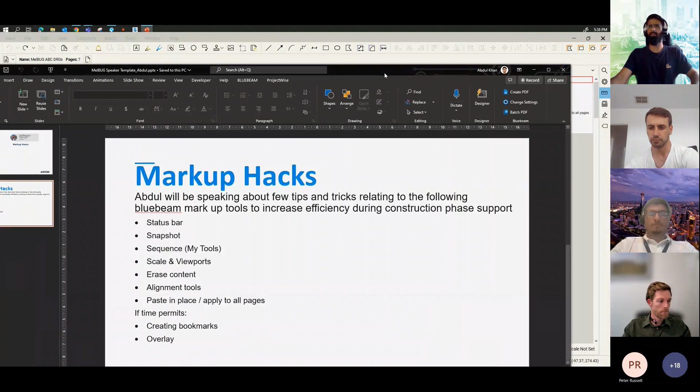Just a quick one - I'll be talking a little bit about status bar, snapshots, that's the agenda for my time. Not sure how much time I'll be getting, but I'm expecting anywhere between 15-20 minutes max per presentation. So snapshot, then sequencing, a little bit about scales and viewports, and then how to erase content from the PDF, along with a few alignment tools, paste in place, apply to all pages. And if time permits, I'd go into creating bookmarks and finally overlay.

Does that timeline sound good, Ben? 15-20 minutes? Yeah, that's perfect. Yep, awesome, sounds good. So I've just created one of the PDFs on drawings.

So this is just for information only, disclaimer, not to be used for construction. I've got a few bridge and building drawings - bridge I've got from my side, Shannock provided a few building drawings from Bluebeam, standard ones. Hopefully you recognize a few.

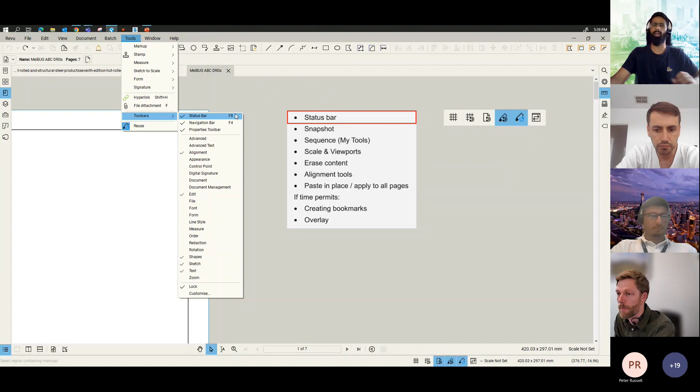So just talking first about the status bar - you'll find it under tools. If you go to toolbar, you need to activate that from here, tick box status bar at the bottom, or you can use F8 as well. So here you've got 4 or 5 options. First thing is show the grid.

So you can turn on, turn off the grid. Second one, snap to grid - so when you have the grid on and you want to start a line or any of the tools, it just snaps to the grid. I normally have the last 3 options open all the time when I'm doing my markups.

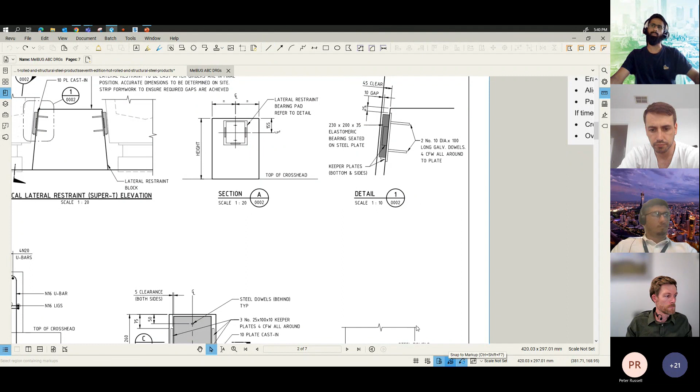So the next one is snap to content - say, for example, I've got a few drawings, so if I'm starting a line or any other tool, it will just snap to the content straight on. And the fourth one is snap to markup - if I've got red line markups or any other markups, I can even snap to those.

This one's a favorite. Sometimes you can repeat things when you're drawing reinforcement, rebars, and things like that - even the sequence, the reuse bar helps. And then I'll be talking about my tools as well, so yeah, I can show you what it does.

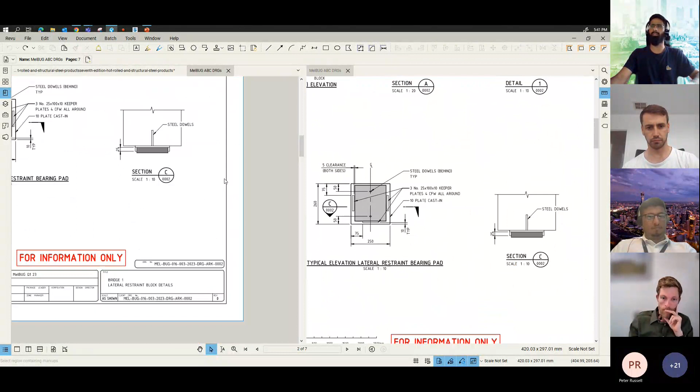And then finally, this is synchronized view - so when you're looking at 2 drawings at the same time, maybe 2 different revisions, you want to see a split view. Say for example, I would just split this, and then as I synchronize, you've got 2 different revisions working at the same time. That's really helpful - if you have any changes at a different location in the drawing, you can just zoom in, check through, and markup.

Yeah, so that's a quick one. Moving on to the second bit, that's the snapshot. So working on CPS, I realized a lot of the times you already have the design drawings ready to use.

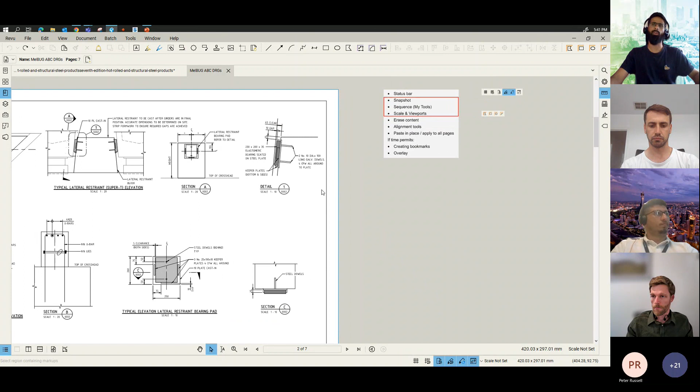Most of the packages are already complete, IFC'd. And then from the standard packages, if you want to do an RFI response or update a checkprint drawing, you can just use existing markups or existing IFC drawings and then modify them. Best way of using it is snapshot. On the project I was working on previously, and even now, is redline markup. So we normally do things on redline.

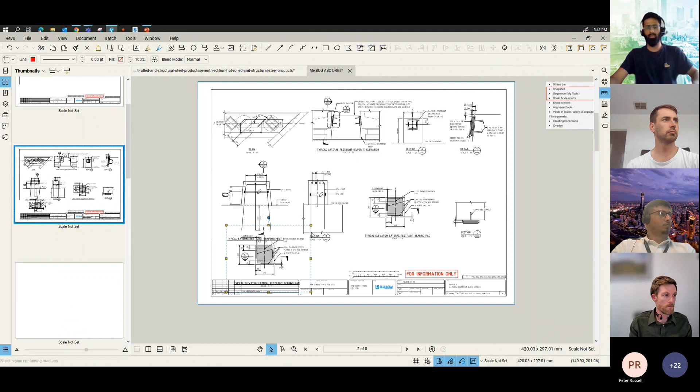So say, for example, I'm putting an example of lateral restraint block. Can just snip it, takes a snapshot, and say I want to use it and paste it, Control V. So because the project requires redline markup, say if I'm using a new page, just to demonstrate. Instead of a blank page, yeah, go. Let's move it up. Oops. Yeah. Control X. Coming through. Oops. Paste. All right. So you've got your snapshot.

Couple of options with the snapshot itself. Under properties, you've got change color. That's really handy, which I learned at the start of my CPS. So you can colorize, you can literally add any color you want. Use the existing CAD drawing, say there you go, and then add updates relevant to any of your new updates, new checkprints.

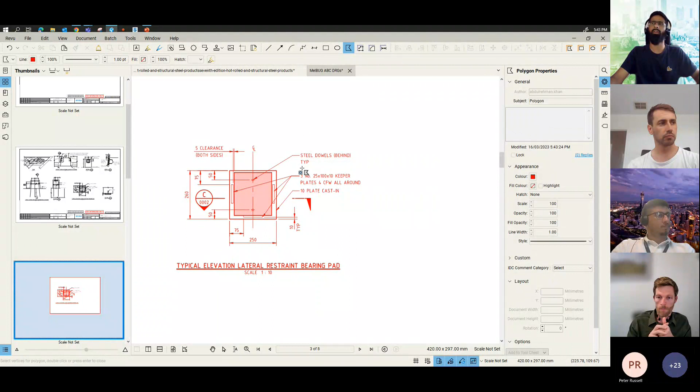The other good thing with the snapshot is, yes, you can add extra boxes or rectangles. I normally use polygon if things don't work. So just put up a polygon and then fill it in with something like white, normally to hide things, and then make it transparent. Just, yeah, there you go. So those previous markups are gone. And you can do the same thing even if it's internal minor details where you want to use a polygon or rectangle or different object to hide things or mask up. That's a snapshot. Let me know if I'm going too fast or too slow.

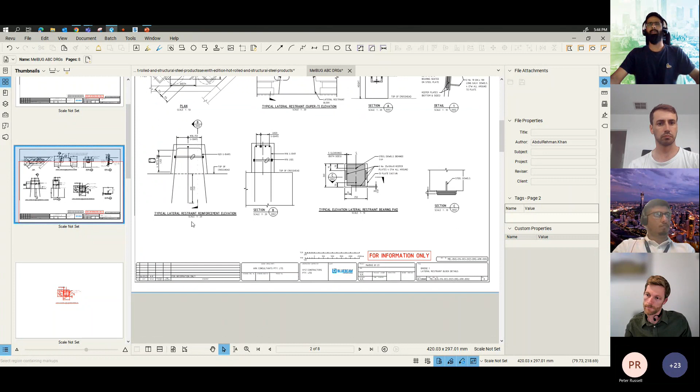Second thing is sequencing using My Tools. This is one of the hacks I think Shannon taught me how to use. One of our engineers wanted to work out a count, and they wanted to see how the sequencing would work. So, for example, I've got number 1 in the series, and I've just saved it there. What the sequence does is, say I've got it here, for example. Normally, you need to save it in your My Tools chest, and then, what's that? Add to tool chest, My Tools. There you go. But if I'm trying to reuse it, it's just copying over. So you just get the same number series.

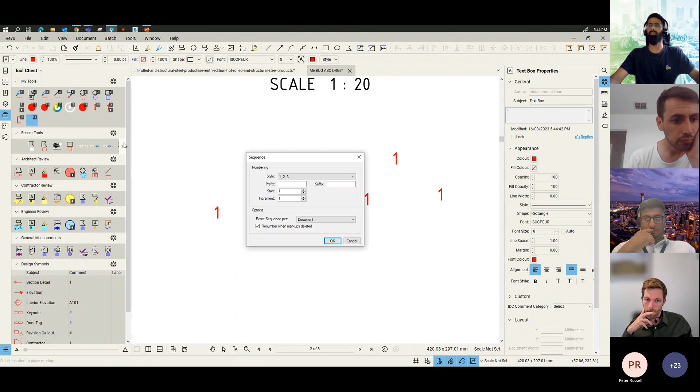However, if I go there and then change the sequence, so define a sequence there, starting prefix 1, increment 1, you can have multiples of 2 or 3, up to you. Then it increases 1 by 1. So for example, now I'm using the same thing with the reuse markup tool. Say 1, 2, 3. There you go. So that's an easy way of adding a sequence, counting things. I know you can do the count measure, but if you have a number in front of you, that would be easier to count things. That's a sequence, and probably I'll just leave them there.

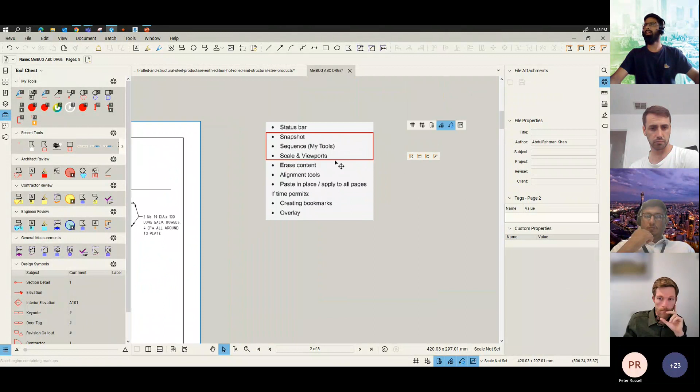Scale and viewport. And if you have any questions, maybe you can ask on the go as well. So scale and viewports, I think my estimator friends or even architects would love the scale and viewport side of things. Normally, when you're using scale, you've got scale up there. I've just changed the side bar, so I've got my search and then the other bar there to use thumbnails. It's easy to navigate and also gives an Adobe view, I guess.

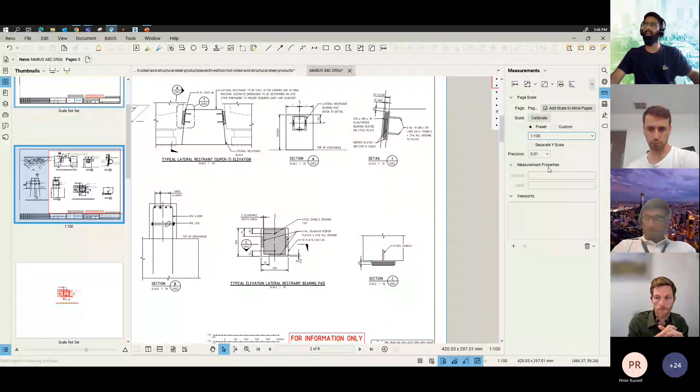Coming on to scale, you can calibrate if you don't have any scale there, or I normally prefer to use preset, say 1 in 100, and then precision 1. There's a good option: you can apply this to all other pages. So literally the whole set in one go. So say add scale to more pages. So I can apply that to all of the pages. So my scale stays 1 in 100 on every other page in this drawing set.

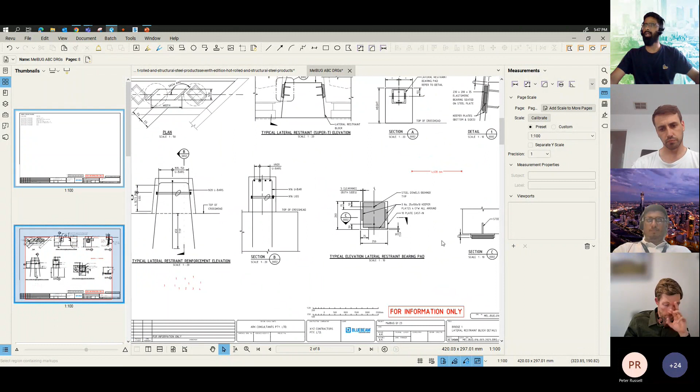Moving on to viewports. Scale, now you know that you can use that for measurement, say 1 in 100. I've got precision, so that's 4 meters there. Just an example of using 1 in 100. But now, say in this case, I've got 1 in 10 and 1 in 20 as well. So they're different scales. Here's where the viewport would come in handy. What it does is basically add custom scales in the same whole drawing based on the region.

Say, for example, I'm defining this region there. That's 1 in 100, change to 1 in 10. So there you go. Apply. And it's created 1 in 10. Now, if I move the same measurement, which I was using for 1 in 100, there you go.

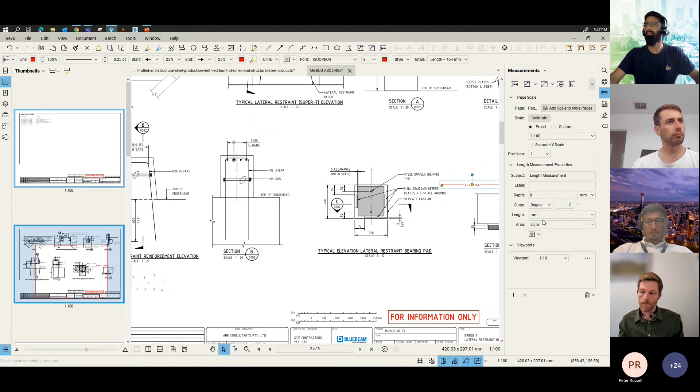It changes, updates. Oh, yeah, 1 in 10, 464. So basically, what I'm trying to do here is create viewports separately. And as an estimator, you take out the quantities. You can easily do quantity takeoffs using 1 in 20, 1 in 10. So if I'm adding another viewport, say for 1 in 20, without any dimensions, you can measure the dimensions as an engineer to double check the drafting I've done.

In this case, I'm using 1 in 20, so the height of my lateral restraint block is 650 mil, and you can add precision if you want. But if I move the same dimension into another viewport, it actually updates itself. So 350, and there you go.

That's how I use viewports, and you can have multiple viewports in the same drawing set, and for the rest of the area, because you've got 1 in 100, it still works as 1 in 100 outside the viewports. That was it for the viewports.

Okay, this is another one which I recently found: sketch to scale. Normally, we are using polygons, rectangles, shapes. However, there's also an option to use rectangle sketch to scale or polygon sketch to scale. What does that do? You can define literally the width and also the height.

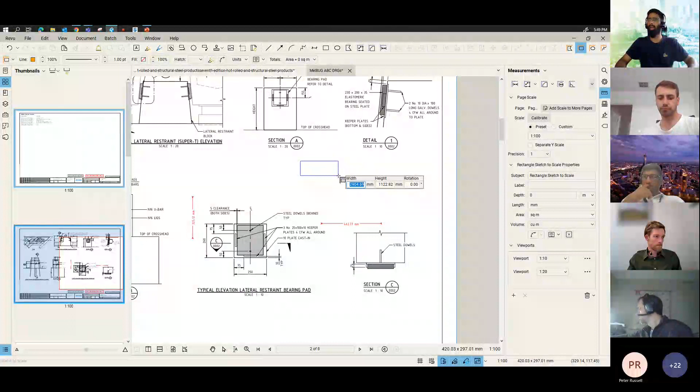Say, for example, I want 400, then tab. You press tab, you go to height. Sorry. 400 tab, say 600 high. So there you go. That's to scale, 1 in 100, depending on which location it is. Yeah, so this is 1 in 100 with the dimension.

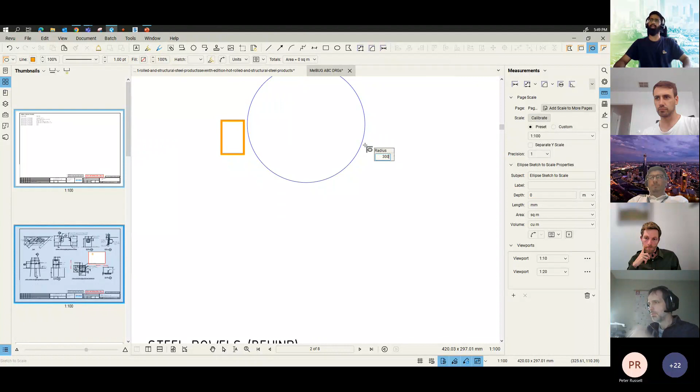Same way, you can create other objects as well. Say, for example, a circle. I've got a 300 radius circle. Same, you can do it with the polygon and polyline as well. Say, for example, I'm doing a crank bar, 1 in 100 scale, say 300 tab. Sorry.

You can use shift for angles, so if you're going horizontal, vertical, and also 45 degrees, holding shift helps. 300, enter, and then I go 45, shift, up, enter, then again 300, double enter. So there you go, that's a crank bar. And that's still to scale, depending on the dimensions you've given. So that's to scale.

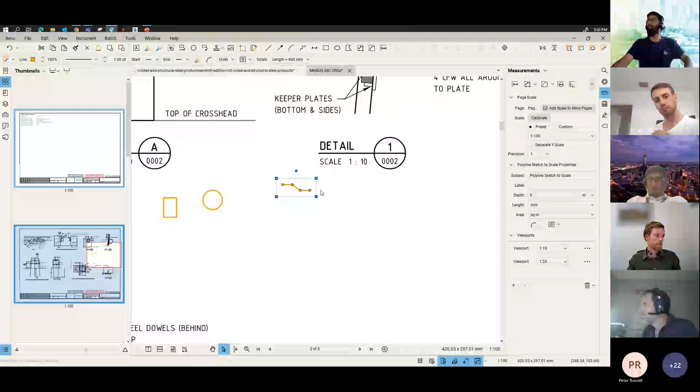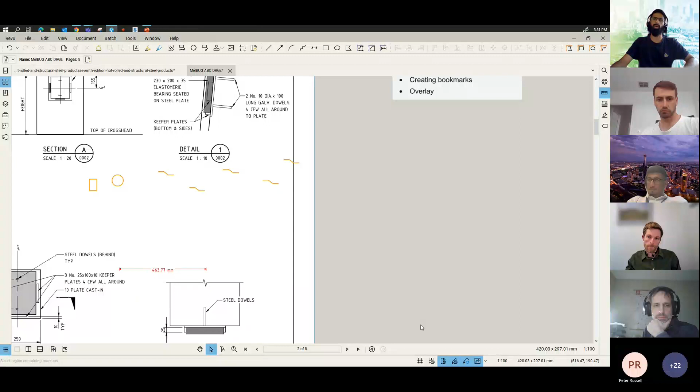Right, so I'll jump into alignment tools because we've already had a few things created here, and then I'll come back to the erase content. Say, for example, I'll use the same crank bars, just copying over a few times. So this is what I was talking about, use of grid and reusing markup tools. If you have it saved under your Tool Chest, you can create it multiple times by just having that option open.

This is my alignment tool. Of course, I've again had those on using the toolbar. So under alignment, there you go. That's where you can find alignment tools. Using that, you can distribute horizontally. What it does is it takes the extreme ends, the front one and the rear one, and then just distributes the objects evenly, same way vertically, and then you can align them all in one place.

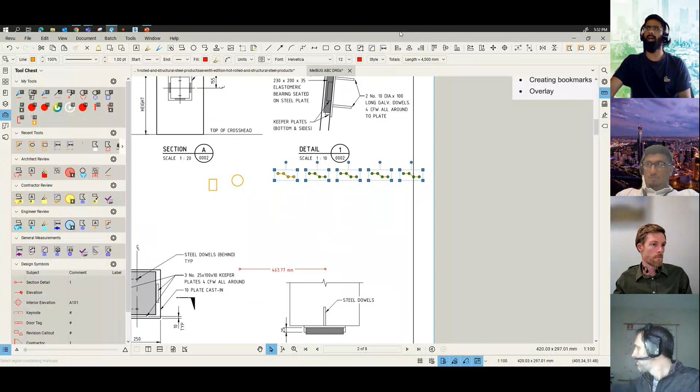So yeah, the distribution. The same way Word works, the alignment things work the same. You can also flip things. Really handy when it comes to flipping orientation of sections, different views. So you can use flip. This one always brings things to the center of your page. So if I click that, it goes all the way to the center of the page.

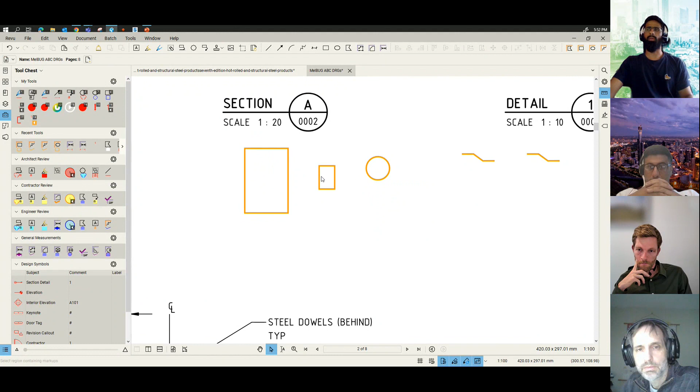The other one I was trying to do was use of this scaled version of my box. Control C, Control V. Say, for example, I've changed the orientation. These are two different size boxes. However, say for a square section, I want them to align, have the same width or same height. So now I'm checking the align height options. How they work is whichever object you select first will be your reference.

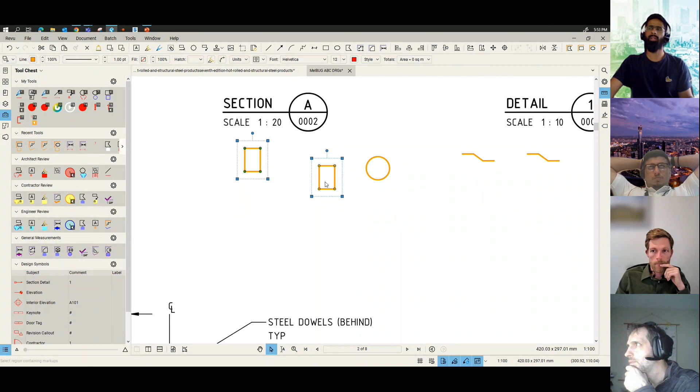So for example, I'm going left to right. That means this is going to be selected first. Based on this reference, align height and align width would work. I'm trying to make this rectangle the same as that in terms of width. Okay, so it's the other way around. But anyway, whichever one you select first will be your reference. Now I'm trying the height. There you go. That's really handy when you're trying to bring different shapes that are already created into scale.

That's alignment tools. How much time have I got? Probably. Lucky or Ben? Yeah, another sort of 7 minutes. Okay. I still have enough time. Okay, good.

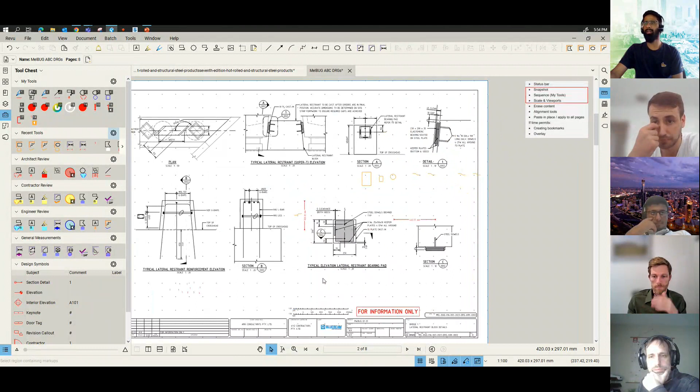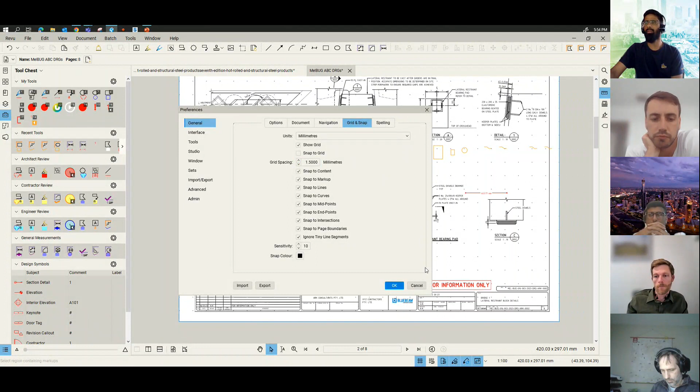So normally the best way of doing the reinforcement and tool spacing is using the grid. Coming back to the grid, you can customize it. If you go under Revu, you've got Preferences, and there you've got grid snap. Initially I've defined my global scale, say 1:100. So I can define units, millimeter, and then set the scale based on 1:100. In this case, it would be 150 mil spacing for the reinforcement: 150 divided by 100 is 1.5 mil. And that basically is 150 spaced.

You've already had one of the shapes created. I've got a filled circle there, and then I can just snap to the grid. What is that doing? Okay, maybe I'm too far. Okay, there you go. So that's 1:100. I think that's too small. Maybe I can change the scale, make it 1:50 maybe.

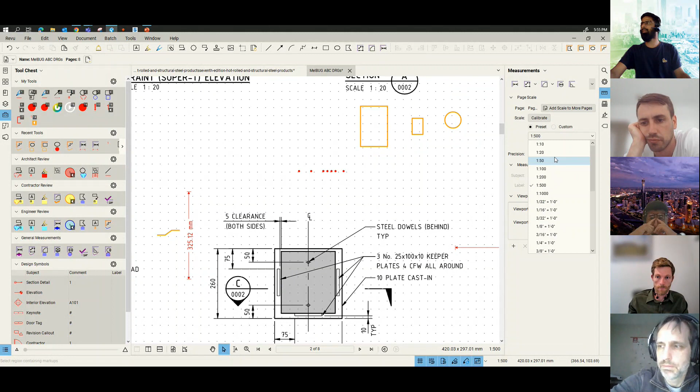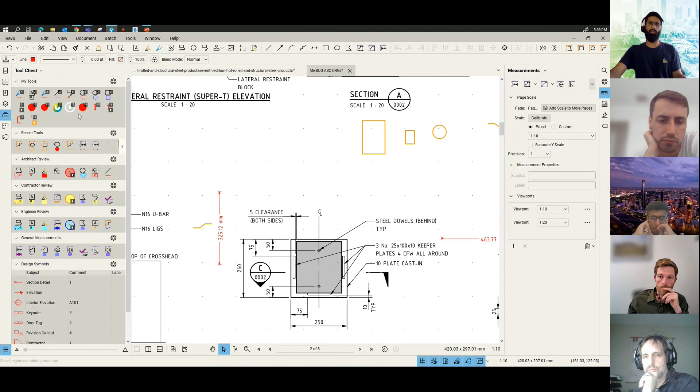Say apply tool scales. Select all. Or maybe make it even smaller, just say 1:10. There you go. And then apply to all pages. Oops, that's preferences, sorry. Scales updated. 15 mil, roughly, grid updates. So now if I'm snapping to grid, there you go. That's all spaced 150.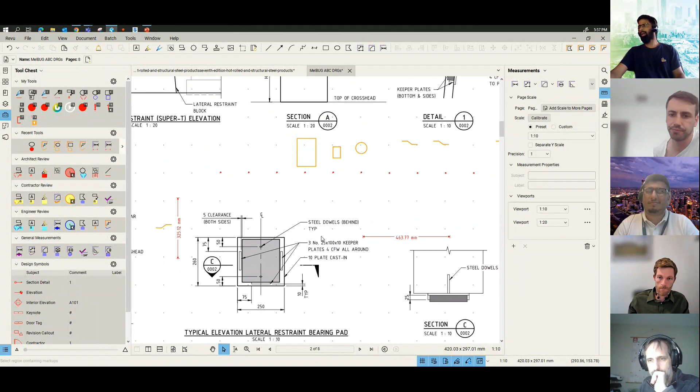You can move them around and group them. Say for example you've got a bigger wall, a retaining wall, a larger longitudinal wall. So you group them, copy the group, and then snap to grid. It's too small anyway. Yeah, that's one of the ways of using snap to grid. And I think that's what I had for those alignment tools.

All right, coming to the erase content. This is really handy when you're trying to erase things within the existing drawing and want to have it neat and clean, without using the polygon option, which I showed previously. For example, say this is a section view of a pile. Clean around, use the existing drawing and just add a few extra markups. Handy tip: never use this erase content option on an existing drawing set. Always have a new file for that. I'll give you the reason why.

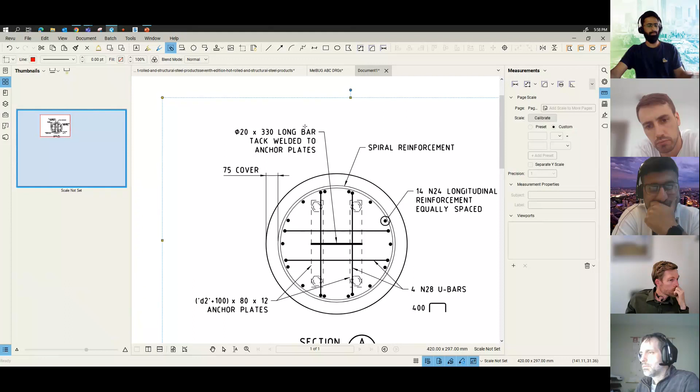Whenever you use the erase content tool, it actually flattens the whole drawing set, and it won't allow you to unflatten back. So it's permanent markups. Anything you already have as a markup stays there; you can't change it. So the best way is to take a snapshot, bring it into a completely new drawing, and then if you want to erase content, even if you have wordings, you still can. So you say erase content, flatten that, and then start erasing the content.

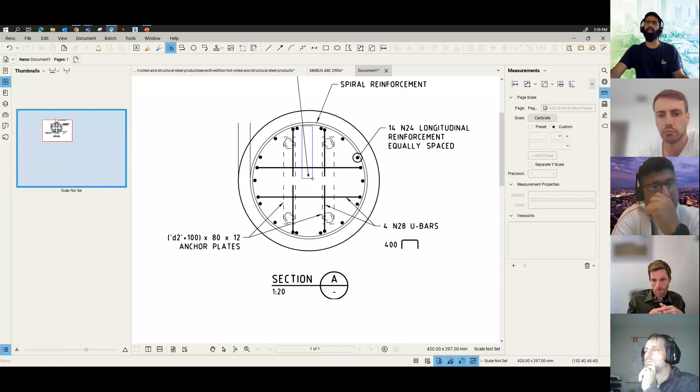Say I'm going to get rid of this cover. Why is that doing that? Oh, snapping. Sorry. There you go. And you can get rid of any of the wordings you had in a drawing. You can even have clean finishes, like getting rid of this rod, or the arrows if you're going to that detail, but I'll leave that to you to decide. I really like to clean up things when I'm issuing or using one of the existing drawings. So you can get rid of those.

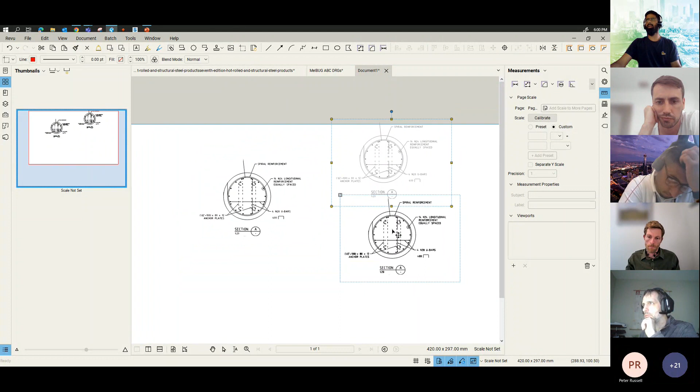Maybe if you want to move the section lower and don't want to show the U bars on the top, just get rid of those U bars, just like that. Make the drawings cleaner. So this is how you can do it. Once you've done this, same old trick: snapshot, copy, and paste, and change color properties if you're using red line markups or other colored markups. So that's the erase content. Right, alignment tools I've completed.

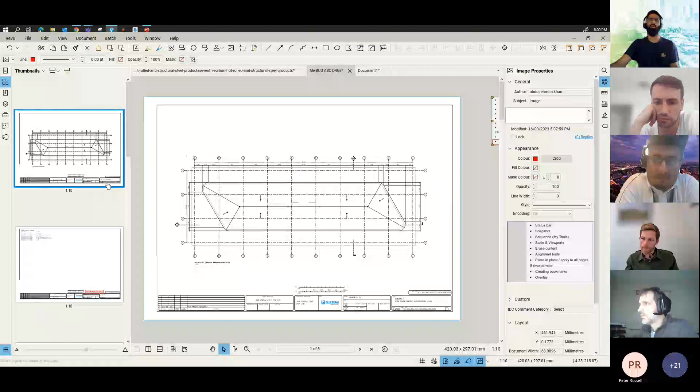Paste in place and apply to all pages. This is really good. Say, for example, you're using two different drawings, and then say you have picked up this markup, just delete one and then show as an example. So I know that every other drawing should have that for information stamp at that location.

So I just copy and then go to the drawing where I've deleted, hit Control-Shift-V. That pastes it in exactly the same location where it was previously. And this also applies to any other markup you have, not only stamps.

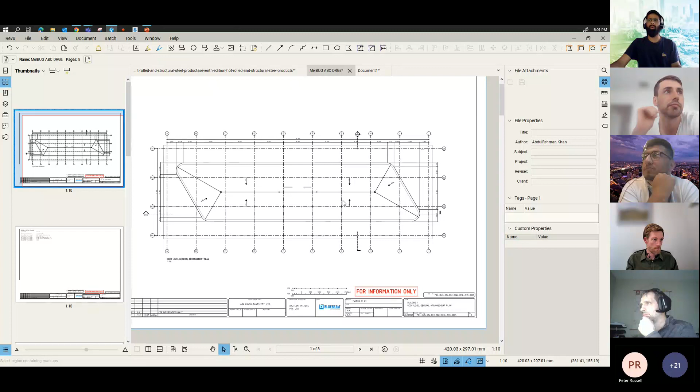So for example, say you've got revisions, updated revisions, and you missed a revision in between for a CPS. Say someone has done XYZ at the same time as you, they have submitted out the check print and you haven't considered that in your drawing. So you can just take their markups, Control-C, and then use the Shift key, Control-Shift-V. It just pastes everything in the same place as the previous drawing without you needing to do anything.

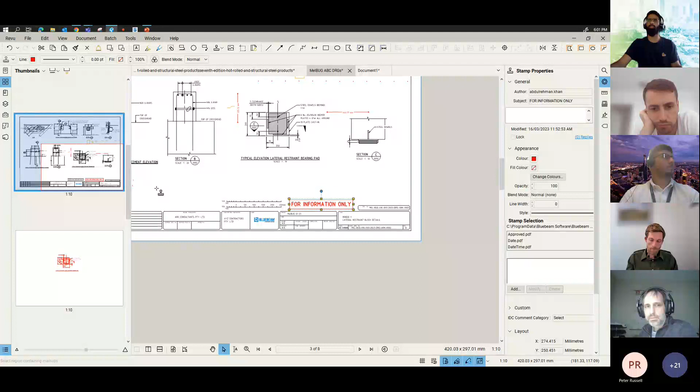Right, so where are we? Apply to all pages. This is really good for these sorts of stamps, when you know the exact location of those stamps, or things like draft. For example, I'll just put up an example draft. Say I'm putting a draft stamp somewhere on the drawing, and I know that location is empty on other drawings as well. So just put it up, paste. Oh, it's just a bit slow. All right, go.

Or it's just for draft, and then no one else can use it for other reasons. You can just rotate, say 45. Rotate. There you go. The other way around. All right, so this is draft, and if you right click, there you can find apply to all pages. It gives you the range. You can apply to all pages, custom range. Yeah, and then hit OK. And it applies to all of those pages.

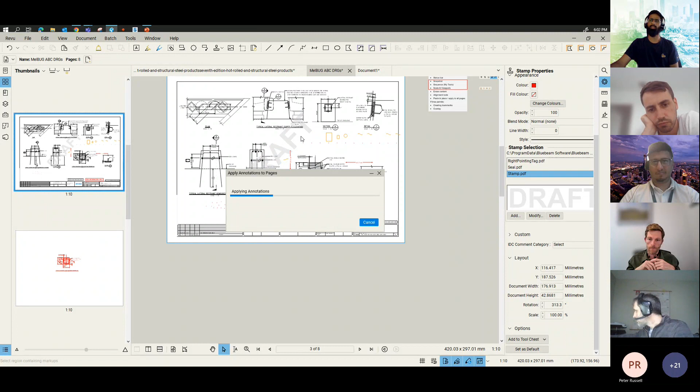It's really good when you're doing mass check prints in one go. So check print stamps, verification stamps. In one go you can have all those once you have completed your checks, of course. And then it applies to all other pages. There you go. Yeah, that's applied to all pages.

So how am I tracking on time? Yeah, you got time for the last one?

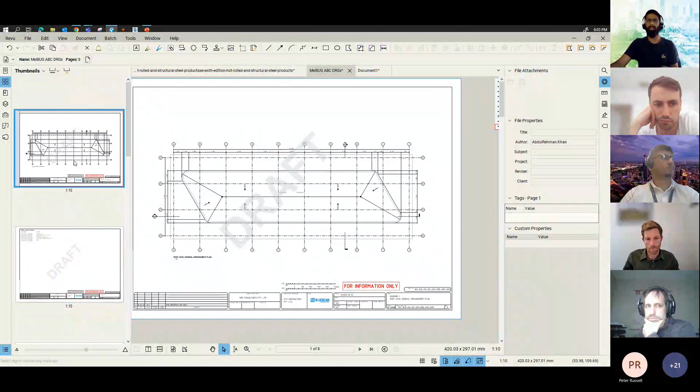Awesome. So this one I'll go overlay. Overlay, I've got 2 drawings. I think I missed. Let's see. A page. Cancel. Just move it down. So I'm kind of comparing these 2 drawings. These were the drawings given by Shanik. Say that's general plan level 6, and then roof level. Why I've got these 2 is they're just similar in plan, but even if you have 2 different revisions of the same drawing, you can use it to do that.

I'm overlaying one on another. So you go to Document, that's where you find the overlay pages option. So click on that. It will open all the drawings that are open if you want. I just want page 5 and page 6. Let me just check. That's page 5, that's page 6. Yep.

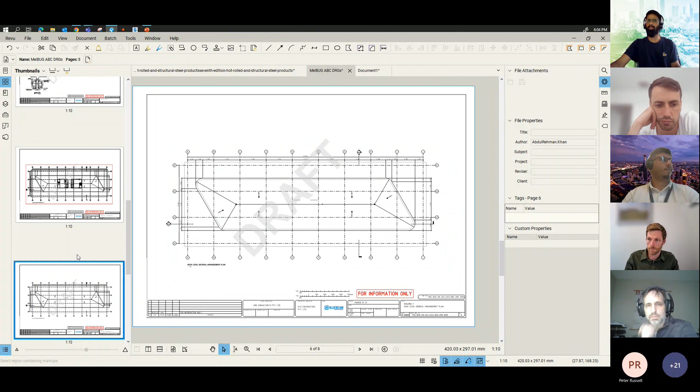Overlay pages, page 5, you've got standard colors. Normally I use yellow. I haven't saved it in my profile, but I prefer to have a lighter color for the previous revision, and the latest revision should have some sort of bold dark color. Say going for dark blue or red. Yeah, so using the same drawing, and that's 6. Okay, so I've got the same drawing, 2 different pages to compare. Hopefully that works. Let's see.

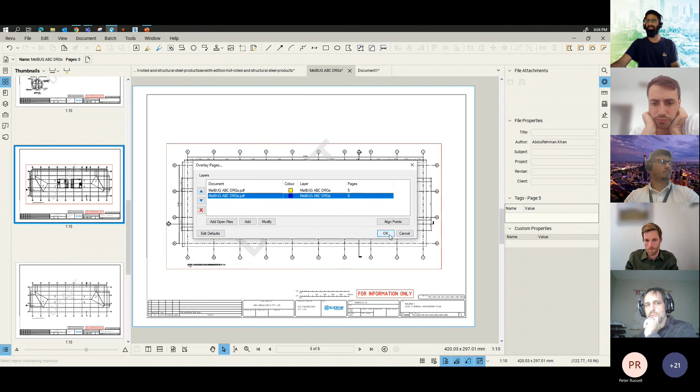Yeah, so there you go. It gives you a new page, new drawing, depending on how many pages you've got in the custom range, and then it overlays them on top of each other, and then you can see the difference between yellow and blue. So yeah, I'm still trying to find the right combination in terms of colors, one light and one dark. But if you have a preferred option, let me know as well. But this is the easy way you can check drafters' content, what they have updated in 2 different revisions.

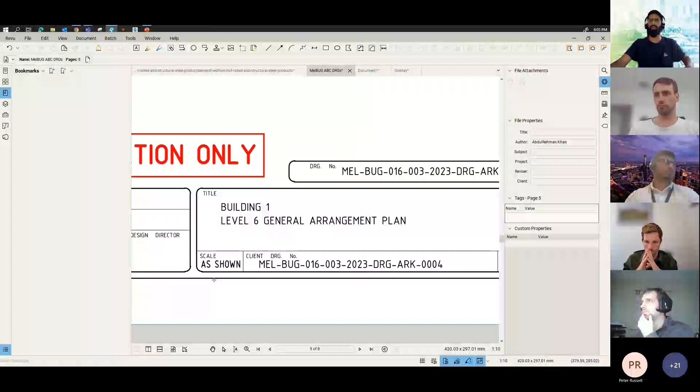And then finally, it was about the bookmarks. This is a really easy task. I like to navigate my PDF using bookmarks. So you've got bookmarks, add bookmarks, or create bookmarks. You can select a region which you want. Most of the time you'd have your drawing sets with standard drawing names, and all of those names will be in the same place. So you just select that name, and then that's your region. Just preview. There you go. Apply to all pages. And that's where we have all our bookmarks, hopefully.

Yeah, there you go. And I can navigate between the drawings using bookmarks. Really handy for doc controllers, I guess. But yeah, that's an easy way of navigating between, apart from thumbnails, of course. That's also another way of navigating between your PDF. Yeah, I think that's pretty much it.

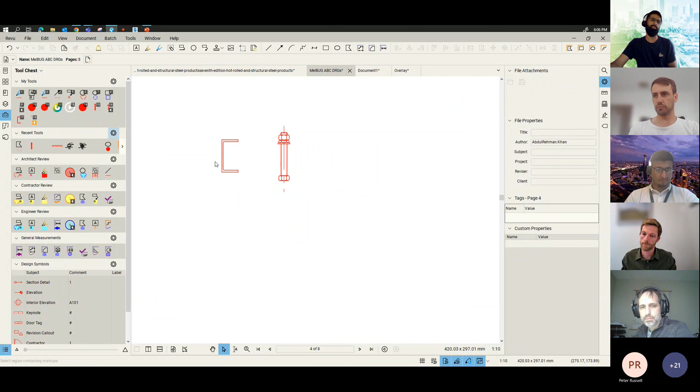Last step, creating your tool chest, custom tool chest. That's handy. I normally have things like bolts, hold down bolts, and things like PFC, which I most often use in terms of connections plates. Yeah, that's pretty much it, I guess. Yeah, and I've covered everything, hopefully in time.

Yeah, that's great. That's really a good overview. I think the overlay, every time you want to use it, someone's randomly printed at the wrong scale, so everything kind of looks incorrect. Same with the compare. So you can do the compare tool, can't you, which clouds the changes, but it seems like every time you actually want to use it, there's something wrong with it, and it doesn't give you what you need. But yeah, I think in your case, they're comparing the updates. That's really good. Yeah, really good example.

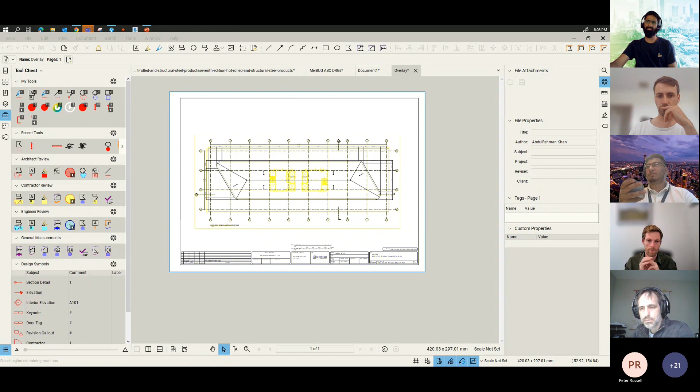But yeah, I see a lot of engineers with the alignment tools, and I think you can start to build multiple combinations of that, can you, with macros and things like that. So I've seen some really cool workflows of aligning the rebar and then spacing them equally and things like that. So that could take you to the next level as well. But yeah, some really good tips in there.

But yeah, very thankful to have you up nice and early. Hope you got a coffee in. I've got a cold coffee now, but yeah, a few IT issues. Right. Probably not because it's too hot over there, I imagine, as well. But we've got a nice 28 degree afternoon here in Melbourne, so it's 9 degrees here at the moment.

Yeah. I was going to just say on that overlay, if you use the 3-point alignment, your drawings don't have to be to the same scale, and they don't have to be to the same rotation either. Yeah, yeah. Great. Great tip. Okay.

Can you see my? Sorry, I've got too many screens on the go here. Can you see my screen here? Yeah, we got you on the screen. Okay. Sorry, I'm looking over here because that's where my other screen is.

I started looking at a combination of Bluebeam and Excel about a year ago, because I work on a lot of civil engineering projects, measure a lot of drainage, roads, things like that for housing projects. I've got this site here. This is one of the latest ones I'm working on, 162 houses on here. And I measure up all the drainage.

If I zoom in on this, I'm marking up all the different plot drainage, the main adoptable drainage. And I was finding that I was marking it all up on here, then having to export it to Excel and then mess about within Excel, maybe load it line by line, etc. And I started looking at ways of, can I automate that process?

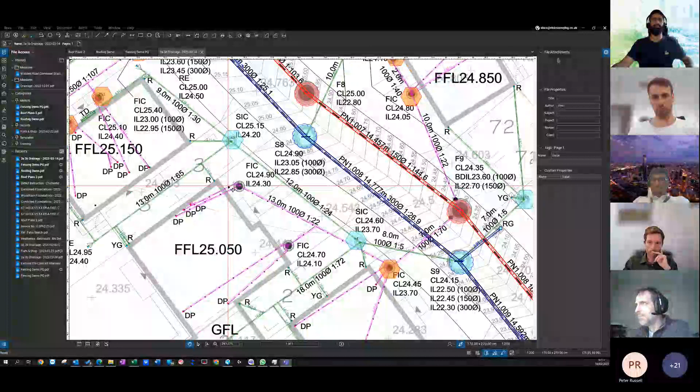So this one gets a bit complicated. One of the first things I started doing was creating custom line styles and custom tools for the different drainage. So this one here says it's got as-dug backfill to the trench, it's a plastic pipe. If I come out into the road, it'll say it's a clay or concrete pipe and it's got stone backfill. So I've created those tools automatically, with that information in.

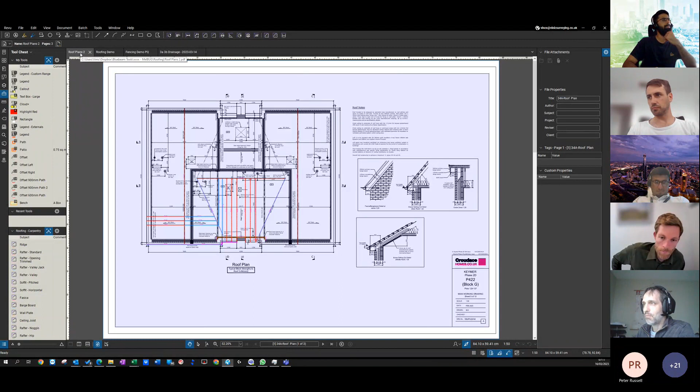If we get time, I'll jump back to this one. As I say, it's a bit more complicated, but I then started looking at what else I can apply this to. When I first started in the construction industry, I was a carpenter, and I used to work with my dad, and we used to pitch roofs, do all sorts of works. So I started looking at what I can create on here.

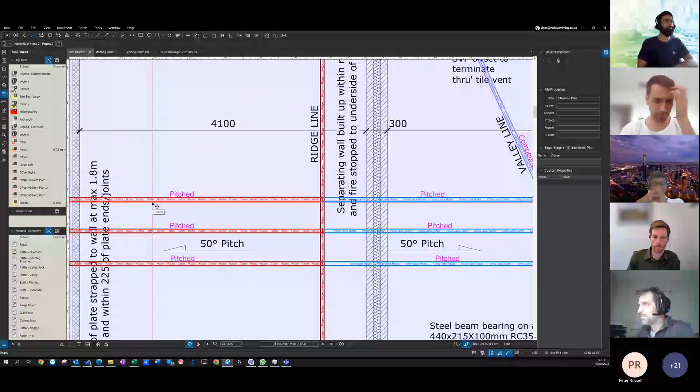So I started creating some custom tools for all the different elements in the roof. I like to, when I look at a drawing, be able to see exactly what everything is as soon as I open it, and at a glance scan across and see what things are. So as you can see, custom line styles, I've created those, made them different colors, and applied some details.

The ultimate aim of this was, this is all my columns, custom columns, etc. in Revu. And what I found was, when working with these, you can get certain formulas to work, but there are other formulas, or you can go beyond what Revu can do. For example, if I had to pick one of these rafters - it's all a bit slow.

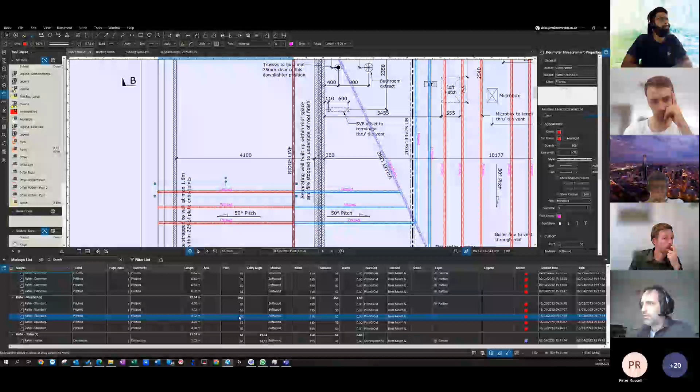So this is my rafter here, and you can put in the pitch of it. You could work out the length of this based on... because Revu's got the tan and the sine functions and things like that.

But if you came to the valley, that involves a second angle, and Revu couldn't calculate that. Then I started looking at other things, like if I wanted to add waste to my length and round things up. So I developed this in Revu, and then we go to Excel and we use Power Query.

I don't know if anyone's looked at this before, but basically the idea of Power Query is you can link and drag information into Excel. So what I've done here, I won't go through it, this is all the setup that makes this work. If we get time, I'll have a look in a while. But basically, I'm linking to where my file is, and I've put the file name in.

And the output on all of this is... it's a bit like, what's it, the automatic link to Excel. I forget what it's called now. What's the link to Excel in Revu, where you can have the automatic link? The quantity link. Quantity link, yeah.

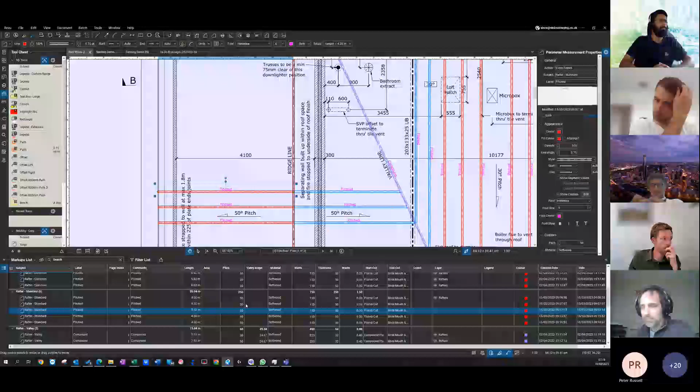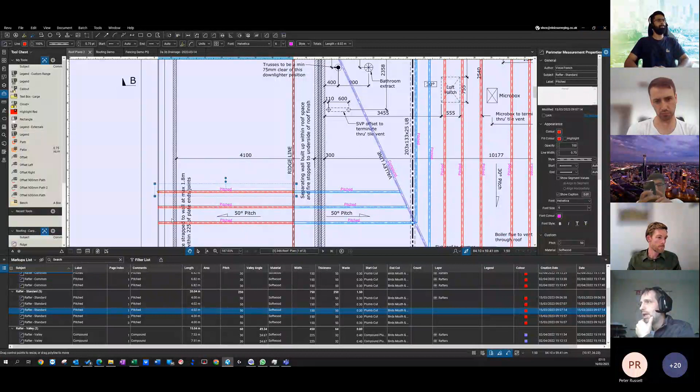So if I jump back to Excel again, if you use Power Query, you can drag in the information automatically, and then in Excel you can have all your tables set up for prices of timber, labor rates, things like that. I haven't really finished this one off because I was just playing around with it, but I've got all the materials, rates for the labor here, material prices, and what I want to do is create a value for the whole job and for the different elements.

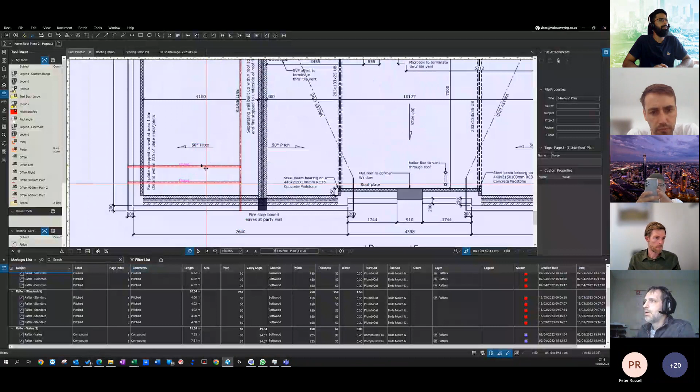So what you can do with Revu is, if I jump to this last one, I've just quickly put 3 markups on here, so it's a bit difficult trying to do. I normally have this on 2 different screens. So here, I've got block G, block I, and I've got some information in here for block I. I've got a ridge, and I've got some standard rafters. And if I jump back over to Revu, I've started marking these up here.

If I just put a couple more of these in, and I choose a valley - I'm putting this in the wrong place, but if I chose a valley jack, put that on there. So what you can do is export your CSV, you don't need to open it. So that's exported. I jump back to my Excel spreadsheet, I hit this button here, and you can see it's gone to find that CSV file.

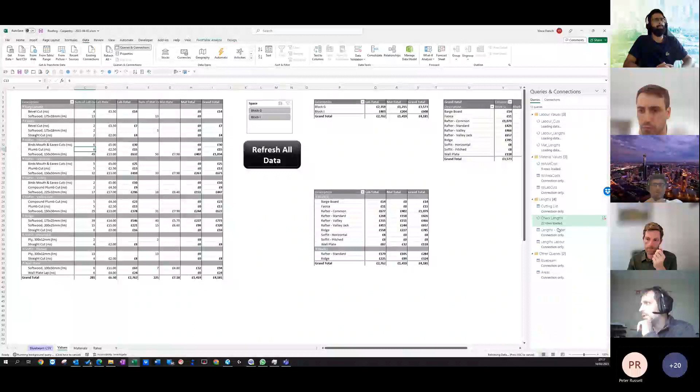And it starts up, this is working a bit more slowly because we're online, but it starts updating all these bits and pieces here. It's adding more rows. So you can see this table is just updated. I've got my extra rafters in there, I've got my Valley Jack rafters, and everything updates automatically.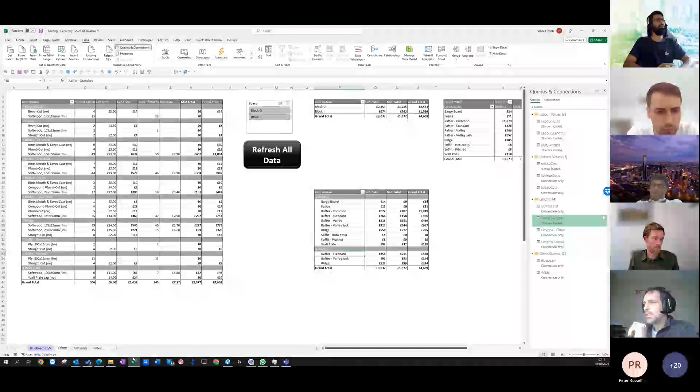But the difference with using the Excel setup is you can build in extra calculations and manipulate the figures. So when I'm creating all of these, what I can do is take for the rafters, that one's 4 meters long on plan, but you get a different length once it's pitched. It will round up, it will add, and it will work out your calculation.

Oh, sorry, am I back? Yep, you're back, okay. We probably lost you for about 30 seconds, Vince. So maybe back to the start of the sentence.

Okay, I can't remember where I got to. So what I was just running through was, obviously on here, when I look at this length, it's on plan. Once you apply the pitch, all of the calculations are worked out in Excel, but it will take the information in this column for the pitch, and it would take this column here for any wastage that we want.

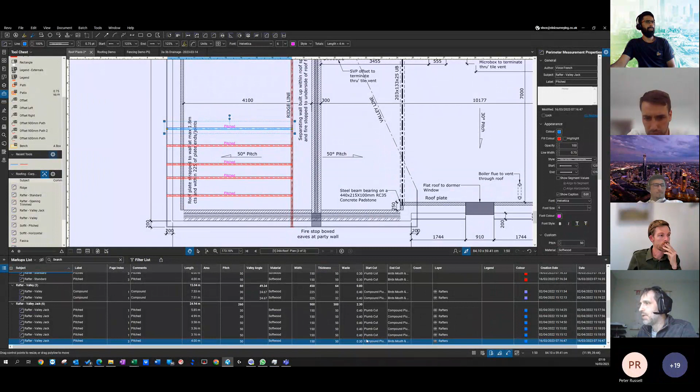But what it also allows you to do in Excel is apply other features. I've got this table here, and it's taking the information, and what it will also do is, after it's added the pitch and the wastage, it will then round it up into the lengths that you actually buy the timber in. So you get a full cutting list that you can send off to your suppliers. That's all done automatically.

So this is a fairly simple one because there aren't too many calculations in it here. I then started looking at, well, if you can do this with timber and roof pitching etc., what else can you work on? And I then started looking at things like, I've got lots of profiles here, roof tiling.

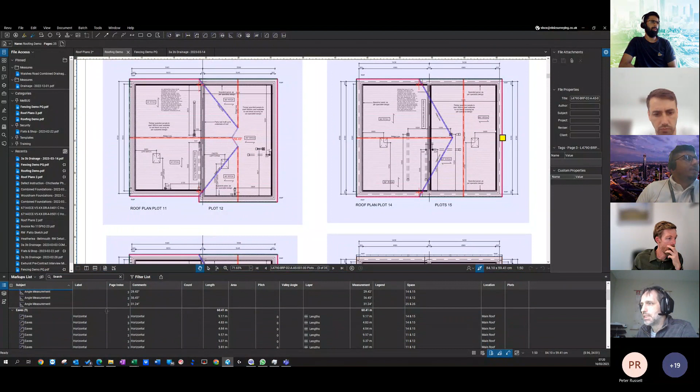So I started thinking, what else can you apply this to? In many ways this works in a similar way with working out the angles, but then I started applying areas for roof coverings and things like that, and I went a bit further with the spreadsheet on this one. So once again, you've got the cover page with where it's linking to the files. I started making a bit more of a fancy spreadsheet.

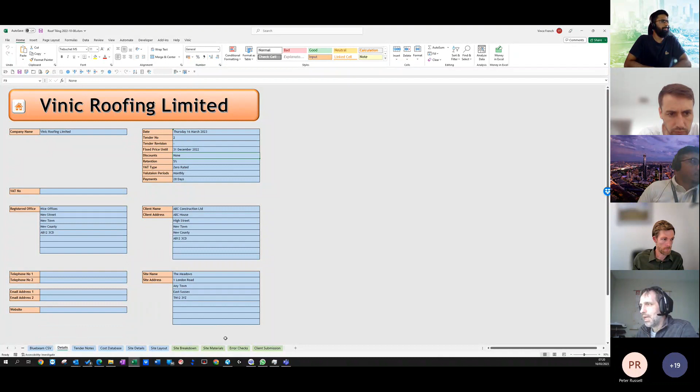But once again, it had materials in it. Then I started adding, I looked at it and said, well, if you're looking at roof tiling, you've got the roof tiles on top, you've got the felt underneath, you've got the battens. Can we start loading that all into one markup on Revu? So if I look at my site details, what I did was I created a table with the main roof, lower roofs, other roofs, and I started building in all these details.

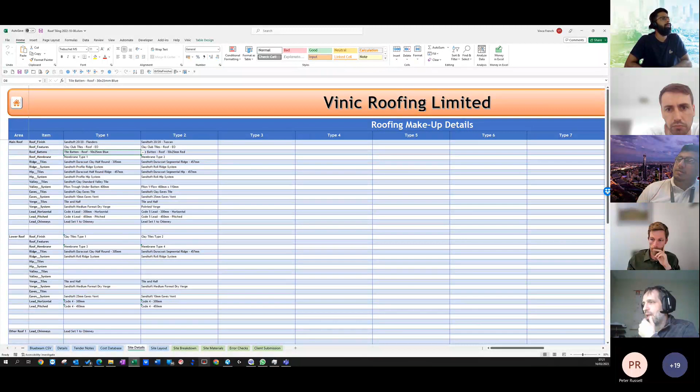So I've got a type 1 roof, type 2 roof. They've got different roof tiles on them, they've got different makeup underneath. It's a bit much to run through quickly in 5 minutes, but you enter in all these details, and what you end up doing is, in Revu, you haven't actually got that many markups to apply.

So these are all my markups for the main roof finish, any features, ridge, etc. Basically the lower roof repeats, any other roofs repeat. So you can see, if I mark this one up, if it jumps to it, I've got a roof finish on here, it's got the area, it's got the pitch. If I then jump and start running through here, my ridge runs through there.

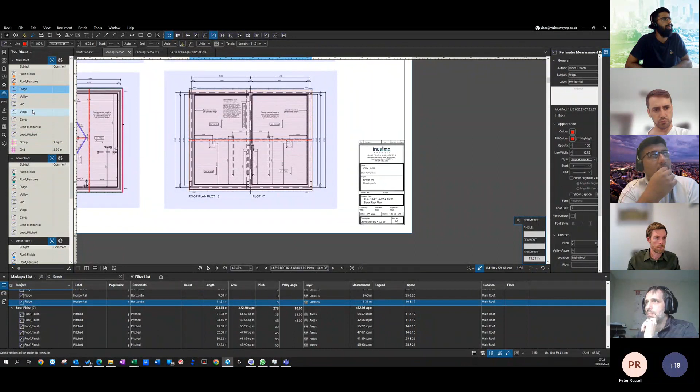What else are we going to put on here? Verge. So this is really quite quick to mark up. So the only thing we have to do on these, once we've marked them up, is find where my line styles are, where's my pitch. Custom. I've got to put a pitch in there, which is 35 degrees. So that's quite quick to mark up.

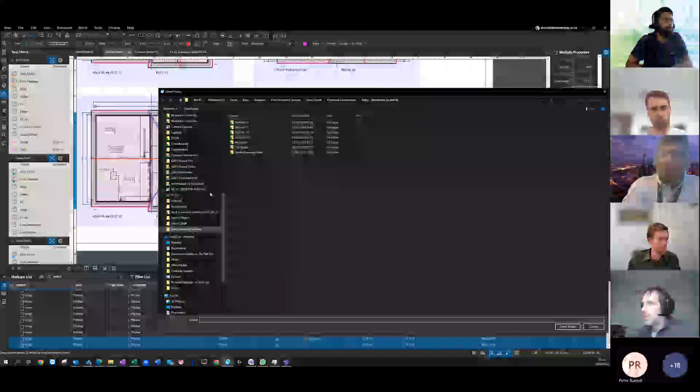Once again, when I looked at this, all you need to do is export the CSV. I've got to make sure it's going to the right file this time. That's the one I want it to go to. Select. Hopefully I don't have to load any custom columns or anything like that because I just want to switch profiles.

So if I jump back to this one and I jump back to site materials. So like here, plot 16 and 17, I've just got the main roof area in that moment. If I click on this, hopefully it won't take too long. Always try to pick something that doesn't take too long. The drainage one has got about 30 or 40 calculations in it, or tables that all mix and merge together to actually get the result.

This would normally have finished by now.

I find Excel is a little bit slower for these queries compared to Power BI. I'm not sure if there's something different in the technology, but I had a question the other day about whether it can speed up the Excel refresh. But you're still saving a lot of time compared to doing it the manual way, aren't you? So, the drainage markup that I was showing you earlier, I tend to crash Excel with that sometimes, but it's a glitch in Excel itself. I've got probably 4,000 markups on that takeoff, and within 30 seconds it will transform it into a complete bill for me.

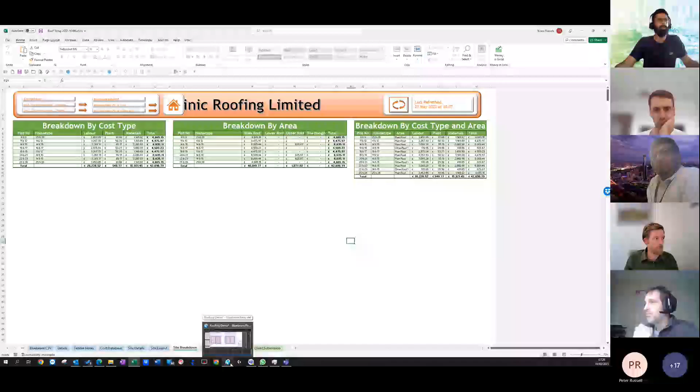Okay, this is annoying, this one normally takes about 5 seconds. Here we go. So if I jump back to my site materials now, plot 16 and 17, it's added in my ridge, it's added in my verge, it's added in the different materials I've used to make up all the roofing systems. On my site breakdown, it will have updated the prices. When I've got the prices plot by plot, I can get labour, plant, materials. I can split it into the main roof, the lower roofs. It does all of this automatically. So if you want to make a quick update in Revu, you just go in, make your changes, hit your CSV export, jump back to Excel, and then just run the update button, and everything is there automatically.

How am I doing for time? That's perfect. I'm creating setups for various different things. I've done fencing, and I'm gradually changing what I'm doing in Excel to make it more dynamic, which does speed up things. It's not all about using Power Query - I've discovered lately that you want to do certain things in Power Query, but then other things with standard formulas, etc. You can see the kind of information you can get out of this very quickly.

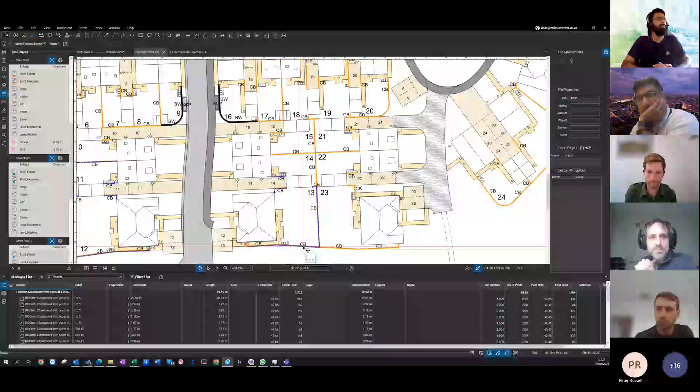I guess it'd be good to open it up to any questions with the bit of time that we have left, because I think there's a lot going on here, and your time is pretty valuable. A question I would have is, how does this compare to other things you were using before? Because I know a few people that have looked down this path, and we know a few people in the market here that have done similar, but we've struggled to get them to present on it, because there's quite a bit of development that goes into it. But how does it compare to other solutions that you've used?

For things like measuring drainage and things like that on the big sites, to be honest, I've never found a piece of software that does it, and certainly doesn't put in what we want to get out of it. That's for sure. I mean, when I do things like this, it's like here.

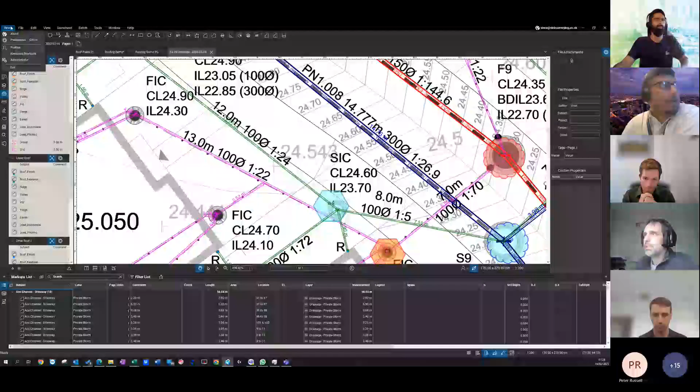Let me just profile drainage. When I put this information in here - so if I grab this one very quickly, right, there's a lot of columns on this one. You can see here, I've got a pipe start, pipe end. So it starts at a shallow inspection chamber, it ends at F1. If I go to this one, I actually say it starts at a shallow inspection chamber and it goes on to the run SIC to F1. When I put that in, it will work out - it knows the depth of a shallow inspection chamber, but it will work out the average depth of this run. And so I can then work out the depth of this run. I kind of know where it's joining onto it. It will look at this run here, and it will work out what material it is, what pipe size it is, and it will add in the Y junction. So that's all done automatically.

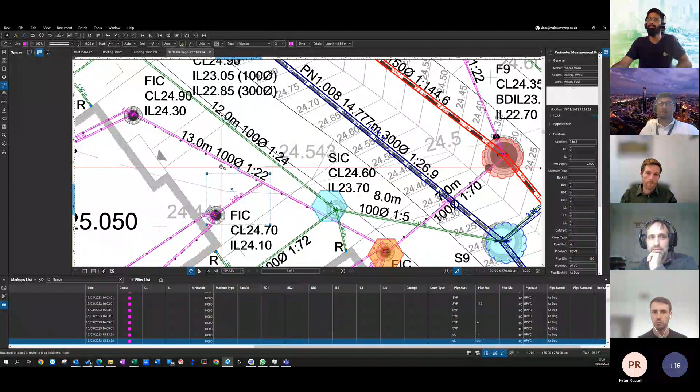I used to have - I've still got a spreadsheet that I use for someone else, and it's great for measuring. But as I say, entering all of this information into a spreadsheet can take a couple of days if you've got 4,000 lines and want to do it properly. The other thing is, it's easy to update here.

If you get a design change, you can just do that and see what's different. And you can also see I've added location here and plots 1 to 3. So I've allocated that drainage. And when I do my breakout in Excel, I can create a table and it gives me all of these details by those plots. So everything is just there automatically.

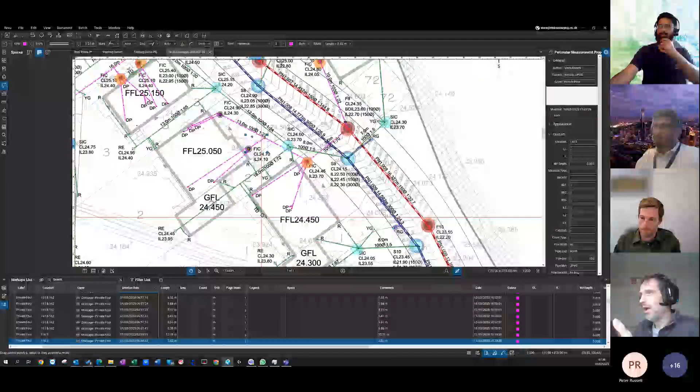I've got everything worked out. So if I was to do a call off just for these plots, I could have all of the materials that I need. I could have the exact value for those plots, and it's just all there automatically. Yeah, that's great. Anyone else with any questions for Vince while we have him?

We'll share the screen again. Do you want me to turn on? Oh, yeah. That's Vince. We didn't do a full introduction. Sorry, I was just a bit crazy this morning. Dove straight into it, but I'm sure people are pretty active on all the platforms as well. So if people are interested to follow what you're doing, look you up on LinkedIn or wherever. I'm not sure how Shannon came across you in the first place. Thanks to Shannon for connecting us.

But we've found in the past it's one of those areas that we know people are doing a lot of great stuff with this, but it's hard to get people to step forward. So I really appreciate you sharing. I think the thing with this is you can create whatever works for your company, which is the most important thing, because not everyone likes to measure in the same way.

There's a lot of focus on using the models, and you're probably receiving a lot of 2D information, so often there's a lot of effort to use models, and then you still have to close the gaps because not everything's in the model. Because we're the subcontractors, all we get are the PDF drawings, basically. So like this site, I've stitched together six A1 drawings to make an entire site layout, so I can see it all in one go, and then I've started marking up from there.